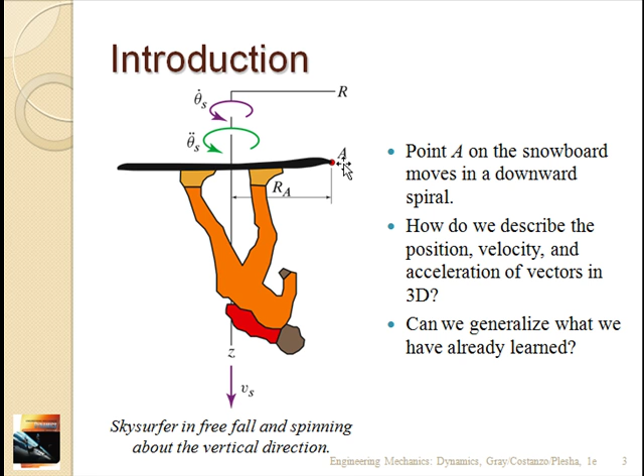As an example, we look at this sky surfer. It's this guy attached to a board, falling upside down, falling downward, and rotating. He's got some angular velocity theta s dot, angular acceleration theta s double dot. There's a distance from the axis of rotation to point A on this board, RA, and this guy's falling with a velocity vs. What we'd like to do is describe the position, velocity, and acceleration of point A as a function of time using some of what we've been doing.

So we'll look at this in polar coordinates - like a 3D version in polar coordinates. So it's cylindrical coordinates, and there's an r, theta, and now there's a z component. r and theta are in the xy plane, and z is the z-axis in either the Cartesian or the cylindrical plane. So we have three orthogonal coordinates, r, theta, and z. There are three unit vectors, ur hat, u theta hat, uz hat, and uz is ur cross u theta, or ur hat cross u theta hat.

The position vector of this point labeled P is r, that's this distance in the xy plane, times the unit vector in the r direction, plus z times the unit vector in the z direction. This term is this vector here, and this term would be this vector here, and the sum of those two is the little r vector, which is the position vector of point P.

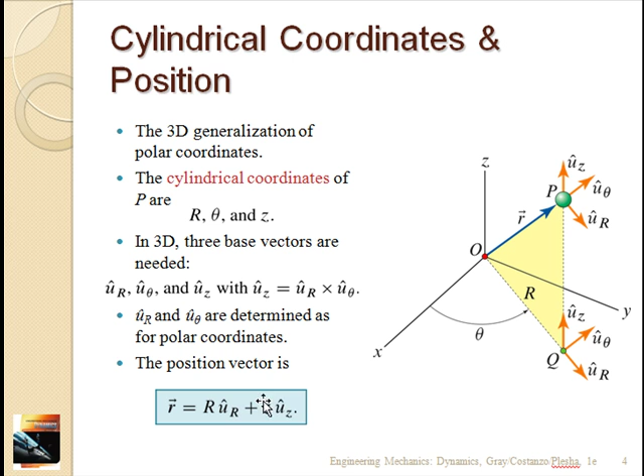To get the velocity, we just differentiate that, and this follows with stuff we did before. You end up with some cross products, and after simplification you get an extra term from the time derivative of r. If we look back here, to take the time derivative of this, it's r dot times ur hat plus r times ur hat dot, plus the time derivative of z - uz hat is not moving, so it's constant, so it's just z dot uz hat. So what you end up with is three terms: r dot ur hat, r theta dot u theta hat which comes from ur hat dot, and then z dot uz hat.

This can just be written as vr ur hat plus v theta u theta hat plus vz uz hat, and the individual components of the velocity are given here. So if you know all these values, r dot, z dot, theta dot, this gives you the components of the velocity, and you can take the square root of the sum of the squares to get the magnitude.

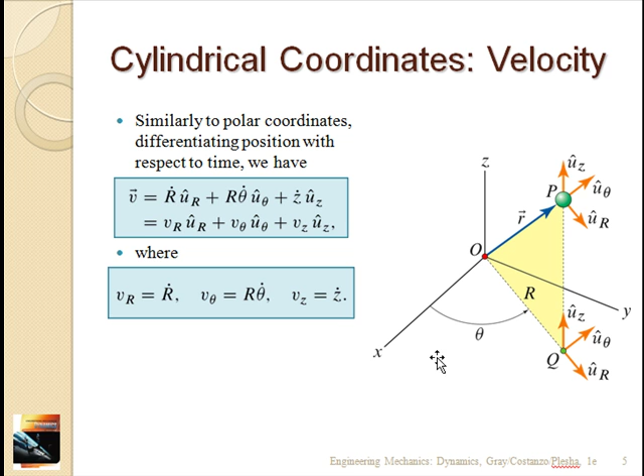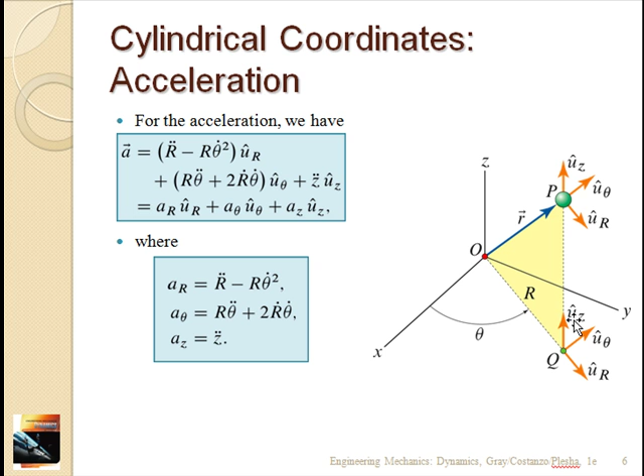To get acceleration, you just differentiate once more. Again, this is just like what we did before when we talked about polar coordinates, it just got this extra term on it. So when you differentiate that velocity vector, you get a radial component of acceleration times the radial unit vector, a tangential component times a tangential unit vector, and an acceleration in the z direction times the unit vector in the z direction. Z double dot is obvious. There's r theta double dot plus 2 r dot theta dot for the theta direction, and then r double dot minus r theta dot squared for the radial direction. So this is very similar to what we saw in polar coordinates with this extra z component thrown in.

You can also do this in spherical coordinates. In spherical coordinates, there are two angles, phi and theta, and r. The way it works is r is the position vector from the origin to point P, and R without the arrow is the magnitude of that vector. There's an angle phi, measured from the z-axis, an angle theta measured in the xy plane from the x-axis, and then there are unit vectors in those directions.

So ur is radial, u theta hat is in the positive theta direction essentially, and u phi hat is perpendicular to those two, again positive in the positive phi direction or increasing phi direction. That's the standard spherical coordinates, and the position vector in this case is just our vector r, which is just the magnitude of r times the unit vector in the r direction.

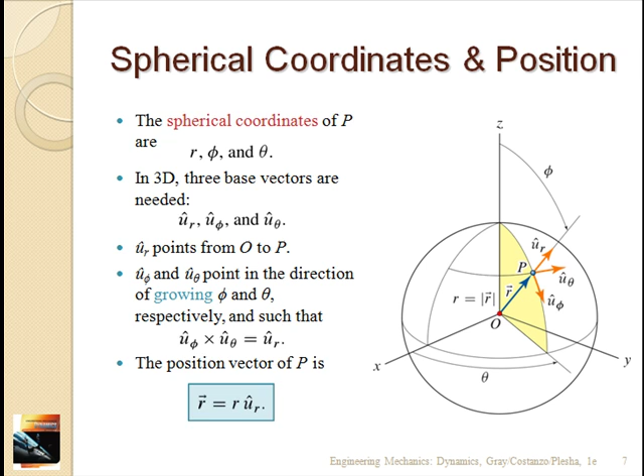So v is just the time derivative of that, and you get a time derivative on the magnitude and a time derivative on the unit vector. It is changing direction—doesn't change the magnitude, but it does change direction. So it has a time derivative which comes from an angular velocity crossed with that unit vector itself, just like we saw before.

Omega is the sum of the rotation rates about u theta hat due to change in phi, and a rotation about the z-axis due to a change in theta. In other words, there's a component of the angular velocity of point P in the theta direction due to phi dot, due to the time rate of change of this angle, and then in the z direction due to theta dot, due to rotations about the z-axis.

If you simplify it a little further, you get for the angular velocity a component in the radial direction, which is a rotation about the radial axis, a component in the phi direction, which is a rotation about the phi axis, and then a component in the theta hat direction, which is a rotation in the plane perpendicular to that direction.

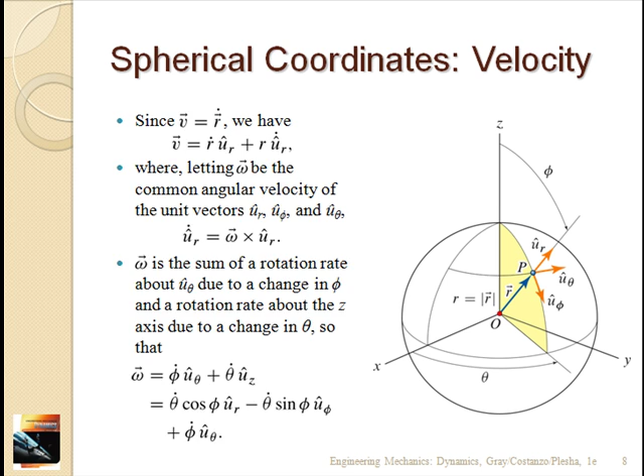So the velocity can be written like this: a radial component times a radial unit vector, v phi in the unit phi direction, and v theta in the unit theta direction. The radial component is just r dot. The phi component is r phi dot. The theta component is r theta dot sine of phi.

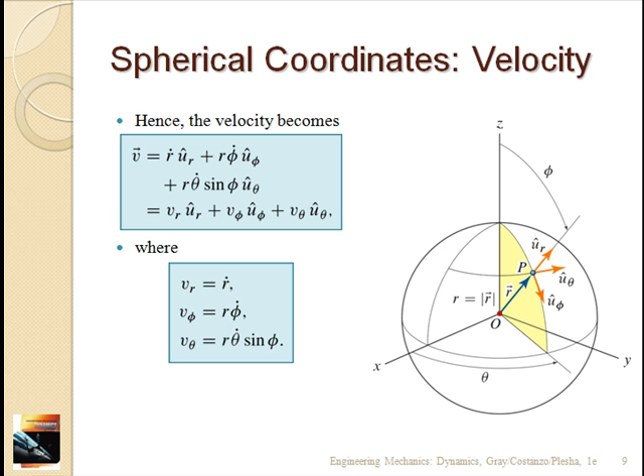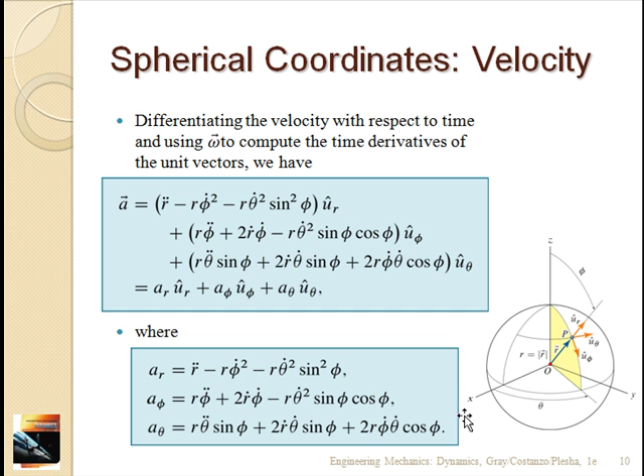If you differentiate once again, you get a radial component, a phi component, and a theta component for the acceleration. They're a little messy, but if you have a functional relationship for r as a function of time, phi as a function of time, and theta as a function of time, you can work all this out and find the accelerations at any point as a function of time.

Now we can do these in Cartesian coordinates too. We can take an xyz plane and write the position vector as an x component, a y component, and a z component with the usual unit vectors. We can differentiate those. What's nice here is the unit vectors are not moving—they're not changing in magnitude, so their time derivatives are 0.

So the velocity is just x dot in the x direction, y dot in the y direction, z dot in the z direction. And the accelerations are just the x acceleration in the x direction, the y acceleration in the y direction, and z double dot in the z direction. This is conceptually much simpler, but for certain problems these relationships get ugly and are much simpler in either cylindrical or spherical coordinates. So sometimes there is a benefit to using those other coordinate systems, even though Cartesian is conceptually simpler and easier to differentiate at this level.

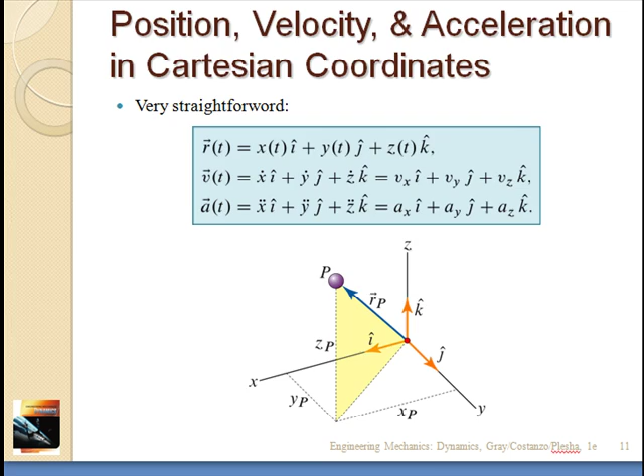So let's look at some examples. The first thing is what's called a precipitator, which is used to pull particulate emissions out of the exhaust of a coal plant. The idea is you have a charged plate, and these particles are charged, so there's an electrostatic force on them, and we want to know the path of the particle.

Particle P is at the origin of this xyz coordinate system at t equals 0. It's launched with some velocity measured by this velocity vector Vp. The direction is an angle theta 2 from the xy plane, and theta 1 from the x-axis. Theta 1 is 30 degrees, and theta 2 is 55 degrees from the xy plane. The magnitude is 5 feet per second.

This plate is 1.5 feet from the x-axis, and it's in the xz plane or parallel to the xz plane. The force from this charged collecting plate on this charged particle gives an acceleration of 250 feet per second squared in the y direction. There's also gravity on this particle, downward at 32 feet per second squared, plus the much larger 250 feet per second squared acceleration in the y direction.

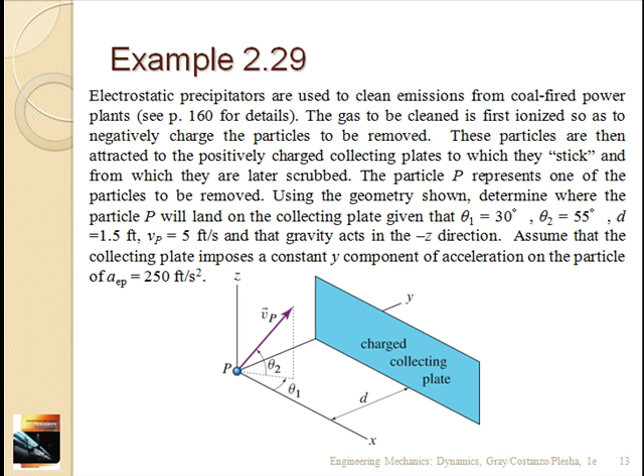We want to know the motion of the particle, all the mechanics of the motion. So we're just going to write F equals ma, break it up into components, and solve those equations.

If we look at this in terms of components, we can break up the velocity vector for the initial velocity into an x component, a y component, and a z component. The x component is VP cosine theta 2 cosine theta 1—because we take this and apply cosine theta 2 to get this vector, and that times cosine theta 1 gets us this vector. VP cosine theta 2 times sine of theta 1 gives us the y component. So the x and y components are given here, and the z component is just VP sine of theta 2.

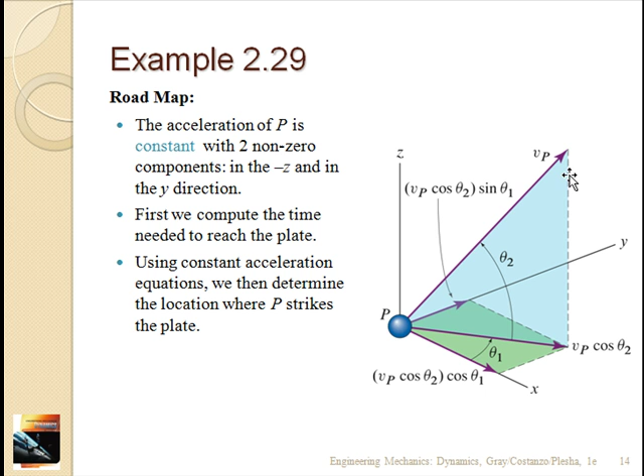The z component, as I said, is VP sine theta 2. I mentioned these other two, they're on this picture. So the acceleration in this case can be broken up as the acceleration in the y direction times the unit vector in the y direction, minus g times the unit vector in the z direction. It's minus because gravity is acting down. And this is the acceleration due to that plate, which is 250 feet per second squared.

We want to find when the particle hits the plate. Let's call Tc the time at which it hits the plate. It hits the plate when y equals d. If we write the y position for this constant acceleration case, it's the velocity of the particle in the y direction initially times Tc, plus 1/2 the acceleration times Tc squared. We know all these: we know d and we know vpy, the initial velocity in the y direction, and we know the acceleration in the y direction is 250.

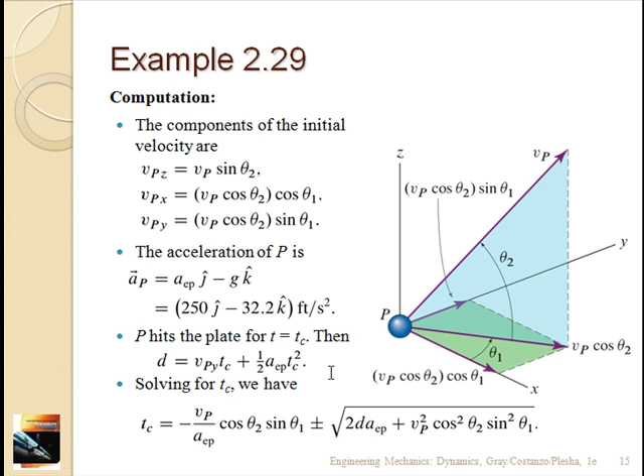So we crunch through the numbers and get a quadratic equation for Tc, and we solve that quadratic and get two solutions. The first one gives us Tc negative, and we know that's not the answer we're looking for. So we find the one positive solution, which turns out to be 0.104 seconds. It takes a tenth of a second for the particle to hit that plate.

If you want to know the x and z coordinates when it hits the plate, you just take that Tc and plug it into the motion result for the x direction. There's no acceleration there, so it's just the initial velocity in the x direction times the time, which ends up being about 0.258 feet. For z, there's constant acceleration in the negative z direction, so it's the initial velocity in the z direction times the time minus 1/2 g, the acceleration in the z direction, times Tc squared, which is also about 1/4 of a foot.

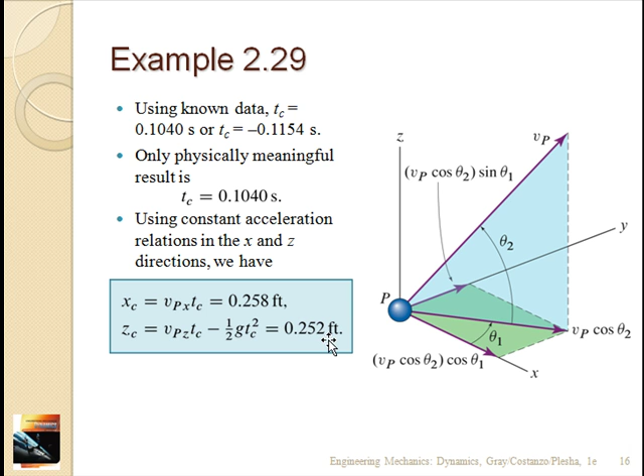So if you were to look at the trajectory, the particle's ejected this way, and then because the acceleration is so high, by the time it hits that plate it's heading almost straight downstream in the y direction, and the gravity gets overwhelmed by the acceleration in the y direction.

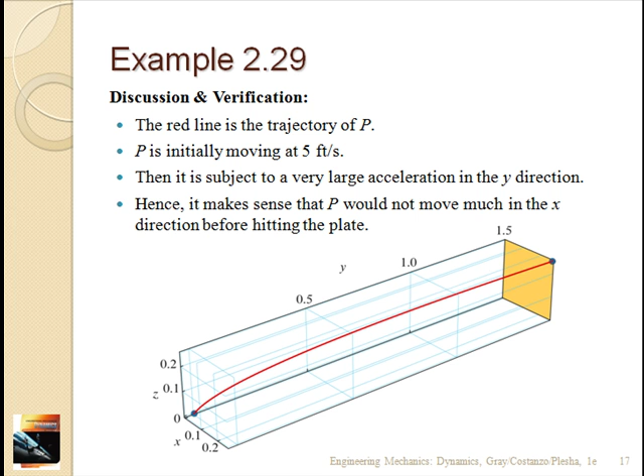The last example is a crane, a so-called top slewing crane. There's this vertical tower that can rotate, with a boom hanging out at some distance from the center of the rotation axis, and something hanging from it. This thing can rotate about the tower with a rotation velocity of 0.15 radians per second.

And this is being hauled up by the crane at 1.5 meters per second, and we want to understand the velocity and acceleration of this thing we're hauling around as a result of these two motions, the rotation of the crane and the raising of that object.

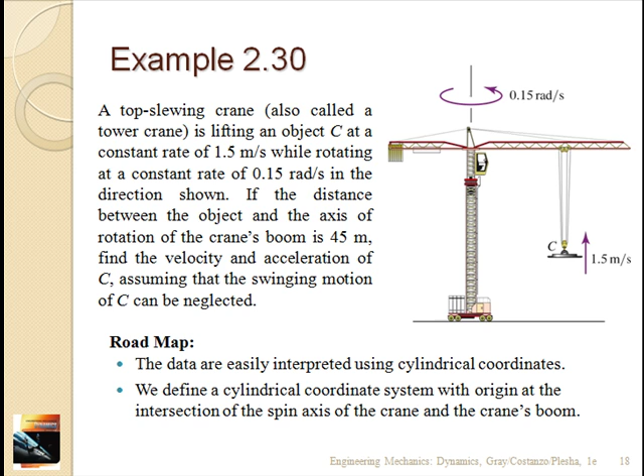We'll use cylindrical coordinates for this, mainly because this rotation about the axis makes that simple. VC, as we saw before, is just r dot UR hat plus R theta dot U theta hat plus Z dot UZ hat. It's just a thing we derived before, and the acceleration is given here, again things we derived before.

The radius from here to here is 45 meters, and that distance is not changing. You might have a situation where point A is moving, but in this case it's not, so R dot is 0 and R double dot is 0. Z dot is the vertical velocity of point C, which is 1.5 meters per second given, and theta dot is 0.15 radians per second. So we just plug all this into here.

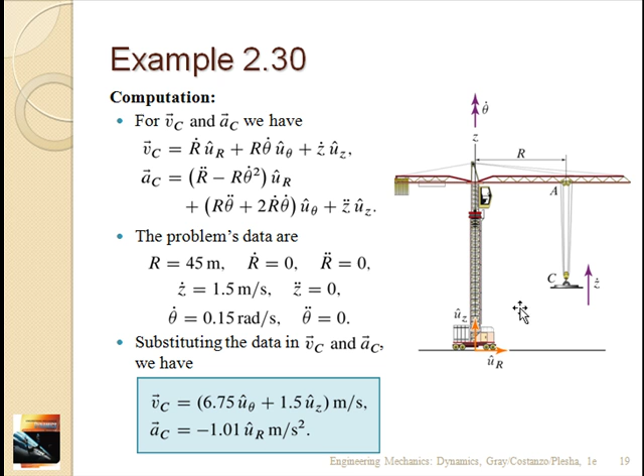We find that the velocity of point C is 6.75 meters per second in the theta direction, which in this case would be into the board, and 1.5 meters per second in the z direction, which is given to us, and it's vertical. The acceleration at point C is just in the radial direction, and it's minus 1.01 meters per second squared. Remember, when something's moving around in a circle, there's a radial acceleration as a result of that - it's this term right here, r theta dot squared times ur hat, and it's negative because it's inward towards the center of the rotation.

Okay, so that's about it for 3D. There is one conceptual problem to discuss: there's this picture of a spherical coordinate system, and the question is, are there any errors in this picture?

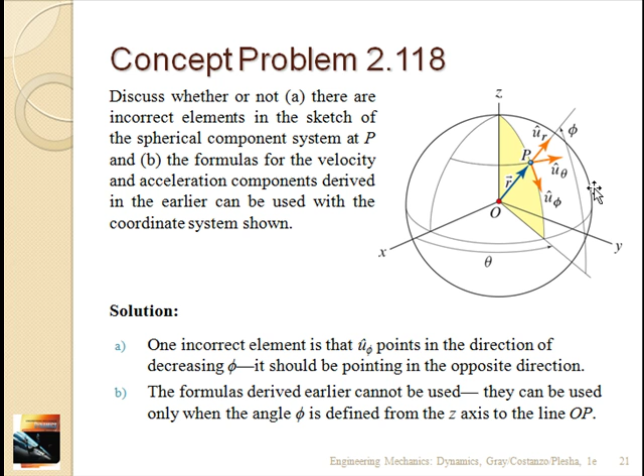You can pause this and think about it if you want, but the solution is here. The main thing is that this polar angle phi is supposed to be measured from the z-axis, and if you measure it from the wrong axis, it throws everything off. Because of that, the formulas we derived would not be correct. All right, that's it for now.